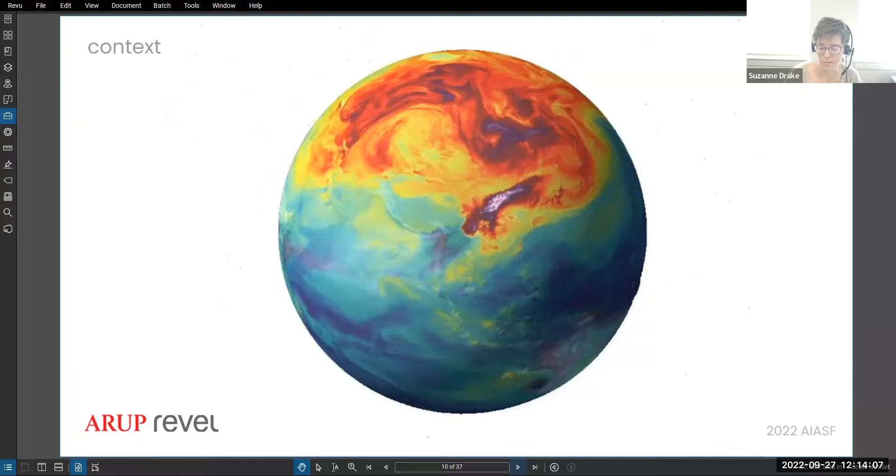And we certainly know now, better than ever, about supply chains being truly global. So we're here to talk about some of the things we can do differently right now. You're here because you already know in your heart that business as usual can't go on, and you're here because you've already lifted your head from the sand. And for that, I thank you very much. We will move on to our learning objectives. I'm just going to breeze over some of this and hand it over to Frances, because we need to jump right into the carbon basics and make sure everybody's up to speed.

Thank you. Thank you, Suzanne.

I love when you give that personal testimony, and it just reminds us of why we even care about this, and how you came to thinking about carbon and the impacts of design. So really the whole point of what we want to bring to you today is to equip you with some resources, and present it in a way that's a little more approachable. There's still a lot of information here, but we want to present different entry points and see what is most compelling to you, and just start anywhere you feel drawn to, and it'll lead you on a path in the same way it has for both Suzanne and I.

Carbon basics. We're going to use some terminology, just getting everyone up to speed on it, on the same page.

So embodied carbon is really another term for greenhouse gas emissions that are particular to the making of materials, and delivery, and the whole life cycle of materials, excluding the operational carbon part, especially the operational carbon of operating our buildings. Global warming potential is the more scientific term, and it's a very specific measurement. That's what you'll find in documentation, but colloquially we refer to that as embodied carbon.

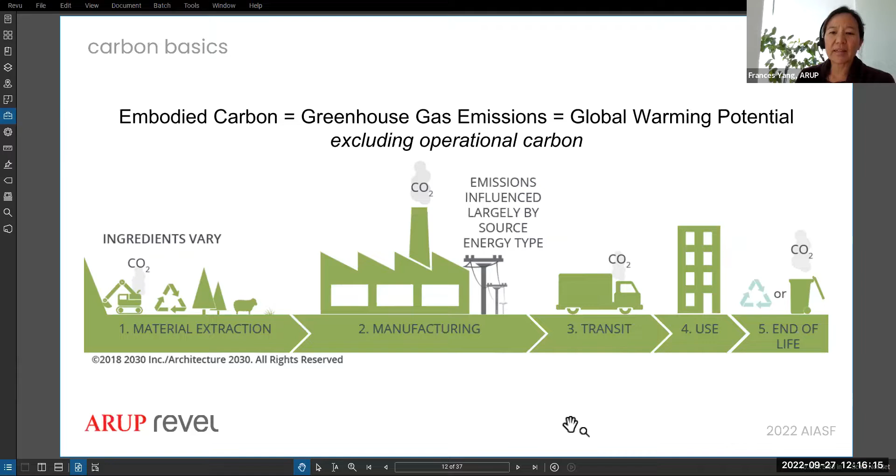So why does this matter? I think a lot of you have seen this pie chart that buildings, both when you combine operational and embodied, it's a huge piece of this pie, and one we have influence over.

Also thinking about where we need to get to, I think it's all kind of agreed now. There's a lot of consensus globally to get to zero by 2050.

This is a somewhat older chart that Architecture 2030 published a while ago. But what I really appreciated about this chart is the idea that a total amount of carbon emissions is what we need to limit. So while we say get to zero by 2050, it matters enormously how we get there. If it was just a straight line, that'd actually be too much emissions, and we would go over the tipping point.

They've actually changed the chart now so that it's even more aggressive, and we have goals to get to zero by 2040. You can visit their site for the updated one, but I just appreciated that how we get there matters, and the more we can accelerate quickly sooner, the more effective we can be in turning the tide on this.

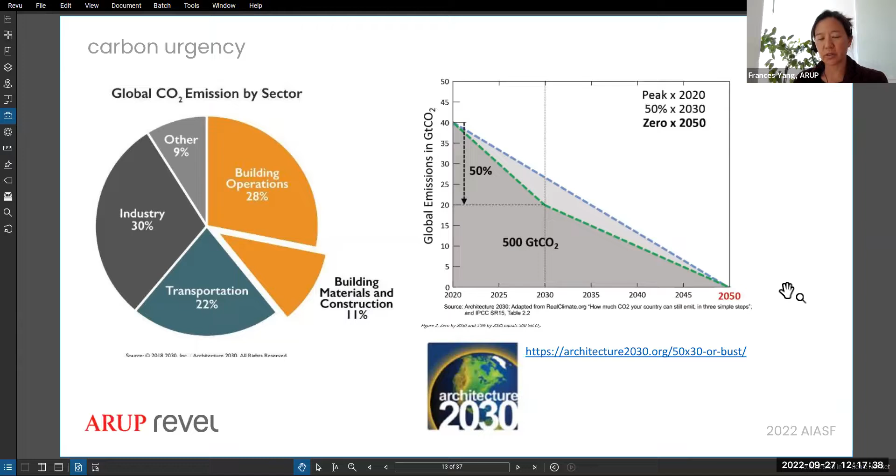So of course this is all with that in mind. Another thing working against us is how quickly we're building. Another statistic that Architecture 2030 has put out: by 2060 we will basically double the entire world building stock. That's just kind of mind-boggling.

And then if we think about, not necessarily how long, a lot of total carbon studies look at both operational and embodied historically, and in the past people felt, oh well, the embodied is small compared to the operational over the whole life of a building. But now, waking up and realizing we only have till 2050, most of that, it's only like the next 30 years, not the whole life of our new building stock.

And when you look at that shorter time frame and think about our new buildings, and even the ones that are meeting the goals, both AIA and Architecture 2030 goals of reaching net zero operational, 50%, almost half, is coming from the materials, because those are there on day one already. So that was a really unique way to start to look at the significance of embodied carbon. Again, thanks to Architecture 2030.

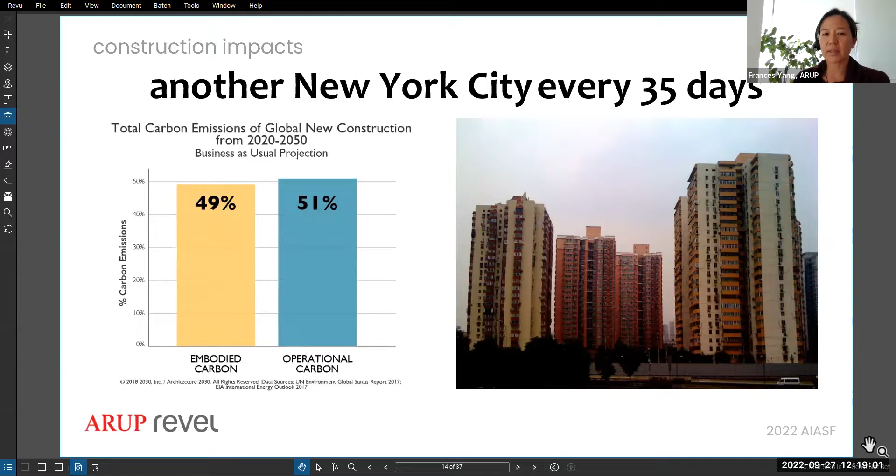Really just emphasizing the storyline coming out of the carbon research, in terms of operations versus embodied carbon. For the longest time as an interior designer, all I was hearing about was the embodied carbon of the core and shell, and how it was so massive, but I didn't see where interiors fit into that. These more recent studies pick up that obvious piece of the renovation portion of our industry that closes the gap to say, yeah, everybody has to focus on this. Nobody gets a pass anymore. So we're all in it.

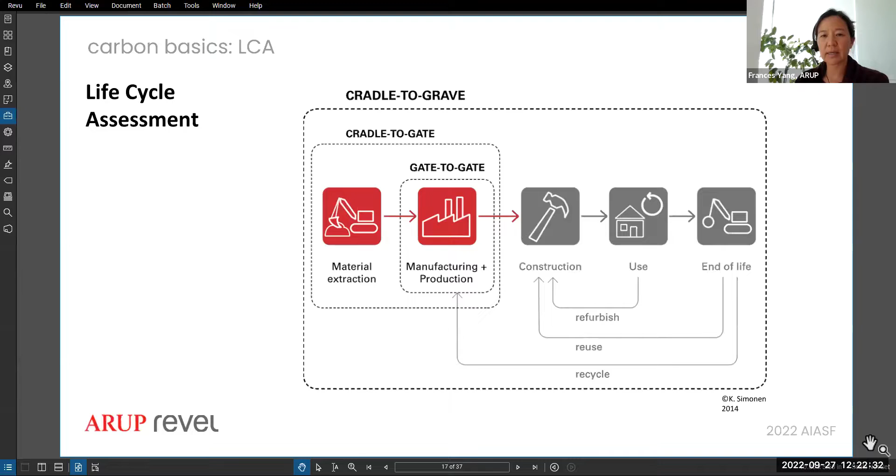Another diagram to try to make sense of a lot of terminology that's out there. So we think of a single product - we're going to dive into looking at some EPDs soon, and want to show what that derives from. So you have that coming from that accounting method we call life cycle assessment, and that actually produces the report. And the report of results is the EPD, the environmental product declaration.

But it has to follow some standards. There are ISO standards, and it has to follow what's called product category rules, which follow another ISO standard. So there's this standardized process involved to get to the EPD, and that's to make it so EPDs could be more comparable. It's not perfect yet, but that's the direction and the reason why we have all these standards that govern EPDs.

Now, how that fits in with doing a whole building life cycle assessment, which you might have also heard about - you can see how doing the LCA is like the heavy lift, it's the expensive part. And that information feeds into some of these tools or studies that people do to capture the whole building and the environmental impacts of a whole building. That whole building LCA also follows certain standards and will lead to a whole building LCA report.

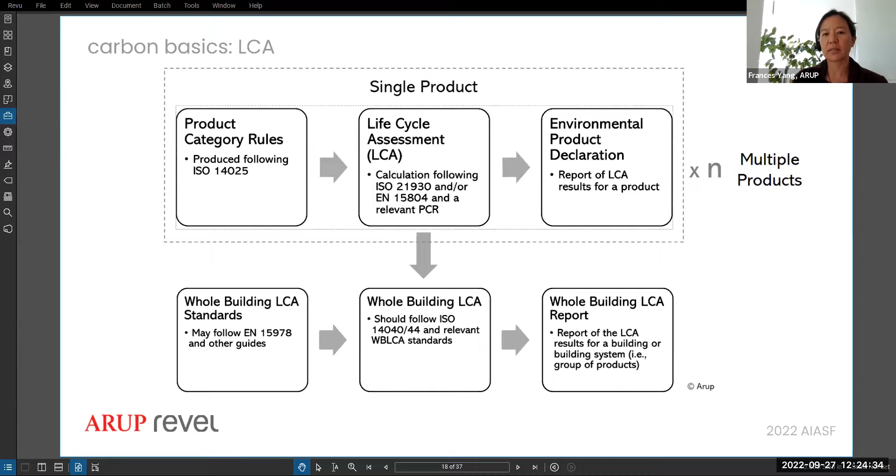Usually, quite often now, there are tools customized for buildings to help us get to those results without having to be a complete LCA expert. So hopefully that helps differentiate when we look at single products versus a whole building. Speaking of the tools, these would be the kinds of tools, especially for whole buildings - a really popular one called Tally that works off of Revit models. And there's also this database called Quartz, which is more where you could download an Excel file.

Quartz is, I should put a caveat, no longer supported. It was this great project funded by Google, but there's a bit of movement away from that and into other tools, because it was also trying to provide health information, and there are other outlets for that now.

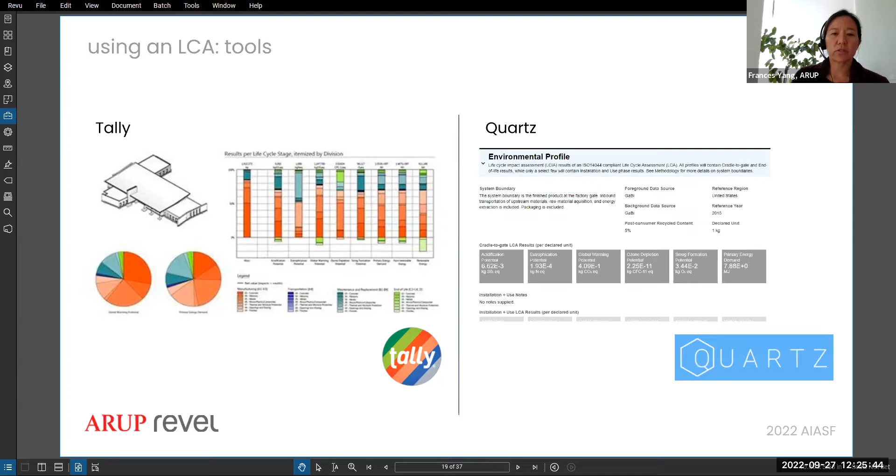Then there's Tally, and other similar tools like Tally, but Tally is the one that can actually work within a Revit environment, which we think is a big plus. There's also ones you might have heard of, like One Click LCA, Athena—particularly for Canadian data—and it gets more specific geographically. So there are quite a few whole building tools at one's disposal.

I wanted to give an example of use of Quartz in particular, because it felt like this was one result from a project recently that was very telling of the importance of interiors. This is where Quartz—it's generic information, so is the data in Tally—and the usefulness we found was to identify the hotspots and see what it is we should tackle.

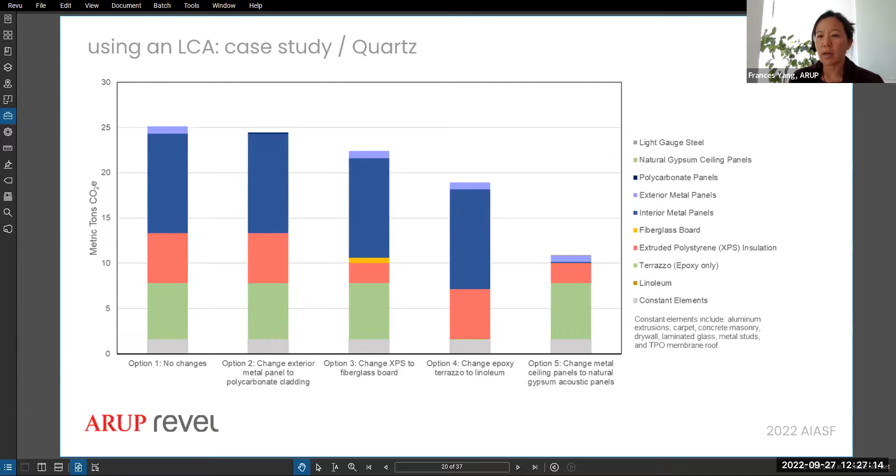Tally is dependent on a Revit model, and realizing that a lot of interior designers don't necessarily get to be at the Revit model, especially not till later in design, we used Quartz with Rhino, just based on surface areas, to get a sense of approximately how much would be wallboard versus panels—what kind of ceiling panels, what kinds of flooring. So we assigned what we knew were the predominant materials, and it really struck us that the most opportunity was in some of these interior items, like the flooring and the metal ceiling panels.

Similarly, for commercial interiors, we were commissioned a study by the Carbon Leadership Forum, and just before this, the Carbon Leadership Forum did a study—the link I put in the chat—that focused again on interiors items. This graph was really helpful to again look at where the hotspots are, where the systems are that we should really put our attention to.

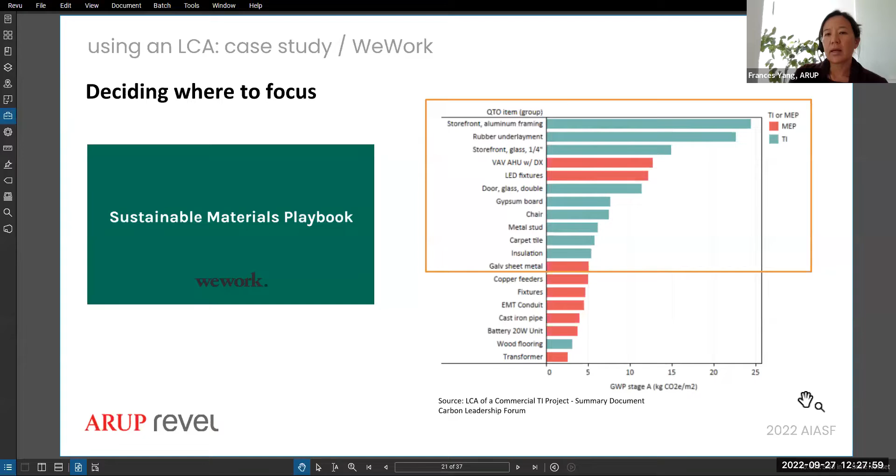From this, when we were working with WeWork, we turned this into something useful either for a client that has a lot of really similar fit-outs, brands and styles, or for your own firm—if there's a palette you turn to repeatedly, something like this could be developed where there's guidance for each of those, so you pick out the top tier of those high-impact systems.

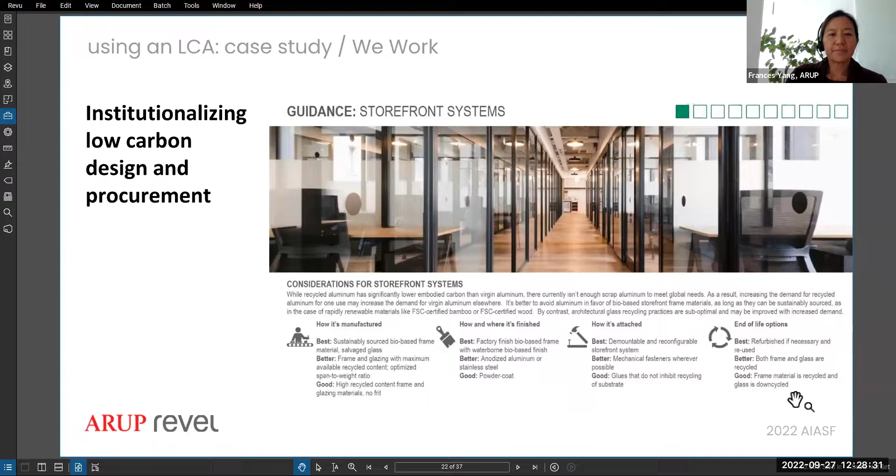So we have EPDs—what are they? They are the life cycle analysis, basically a report. There's no standardization about the look of the report; the data can be sprinkled throughout, but they do all have to report on the same types of things. So when we jump into the EPDs and look at them more closely, that's what we're going to focus on—sorting through them. It can be very daunting; some of these documents are 10, 20, 30 pages long, and so dense with information. But I wanted to spend a little time highlighting the specific things that are most useful off the top.

What I want to highlight here is what is not in an EPD—we don't have health impacts. That's covered under the Health Product Declaration, the HPD, which is meant to be like a companion document. Ideally every product would have both of these reports. That's not where we are right now, but from my own use of HPDs and EPDs, generally speaking, lower toxic products also have lower carbon impacts—that's a nice synergy to see. We're going to spend just a couple more minutes on how you can use these documents to account for carbon on your projects.

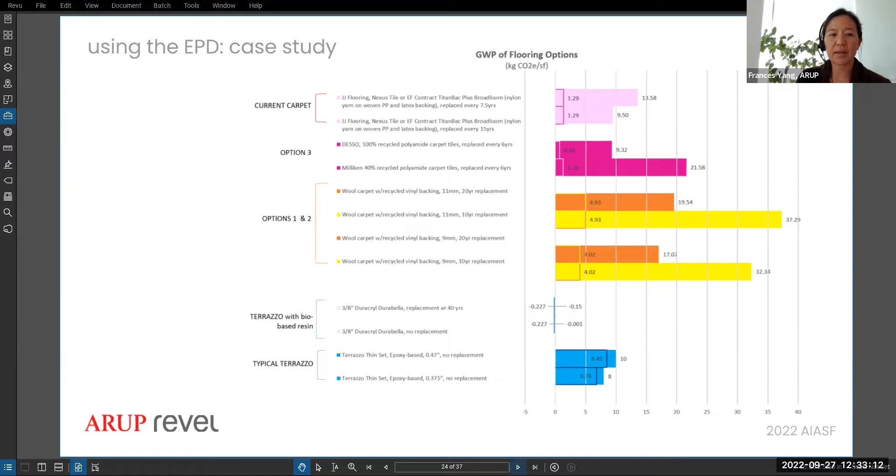And the bio-based material was enormously better than the fossil fuel based materials. So those are some of the takeaways, and then we'll show next where to find some of these EPDs.

Mindful Materials is more of a general database. All the products in Mindful Materials have some form of transparency documentation. They may not specifically have an EPD, but there are other materials there. And if you're a Material Bank user, you can sort through via Mindful Materials as well—there's a nice connection there.

EC3—Frances, maybe you can chat on that one. I don't use that one too often. EC3 is solely focused on EPDs, and it was originally designed for contractors, but it's become really handy even for design teams. You get to see the range of GWP, the embodied carbon number for a whole variety of products, and they have charts that help synthesize the data because they've digitized the information in the EPD.

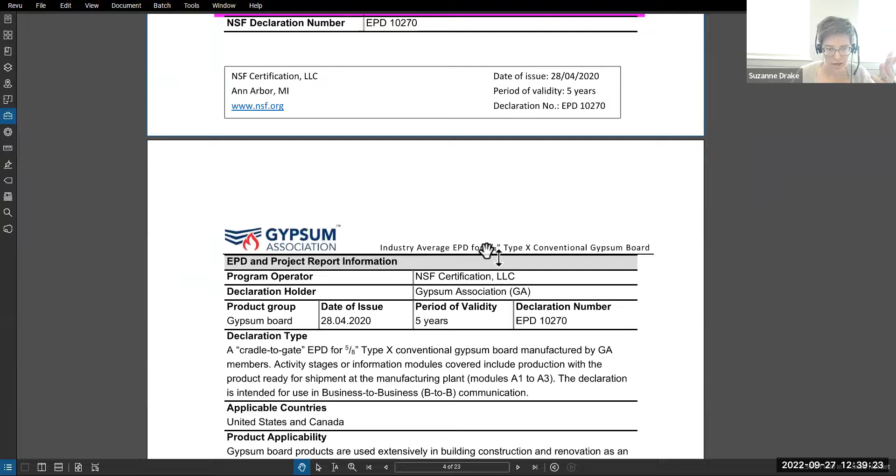So the 5 categories I'm looking for: product name and type, scope, functional unit, validity we just talked about, and then hopefully somewhere in here you're going to see the actual global warming potential, and that's the number that the whole document is wrapping up to.

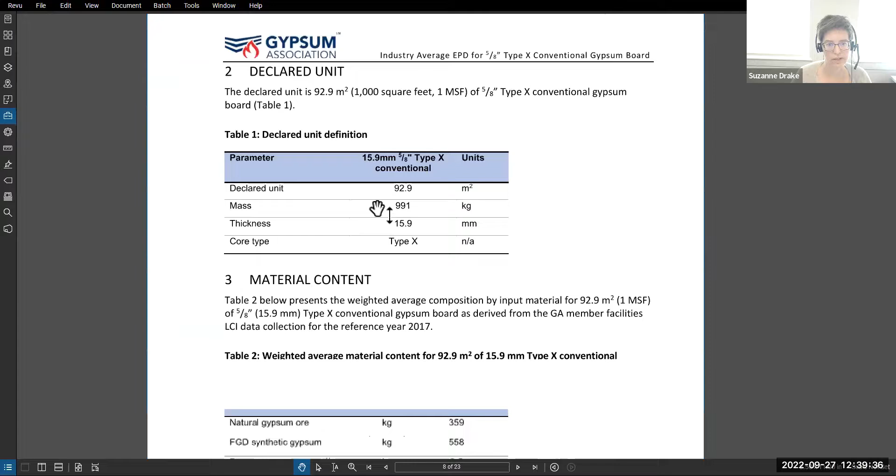So there's lots of background data, more information about the things we've already covered, the declared unit, all the details behind it. If I'm not familiar with the product type, this is actually fairly useful just to see what all is typically in it. This is by no means as thorough as an HPD would be on ingredients, but it gives you an idea.

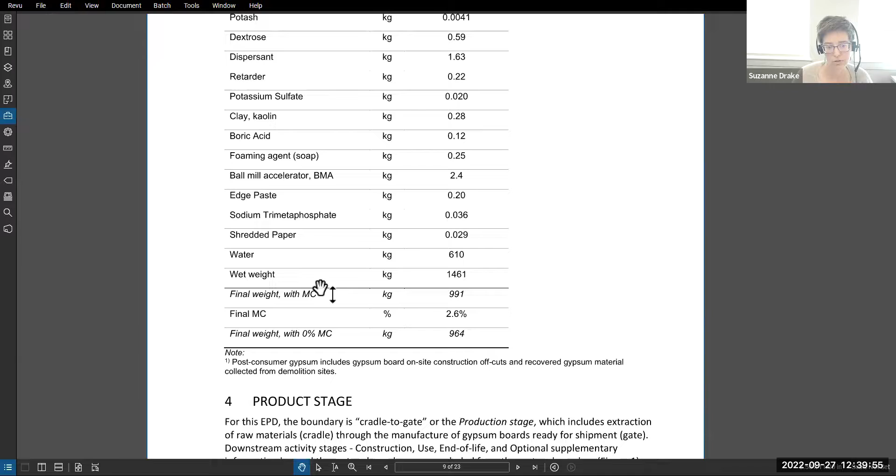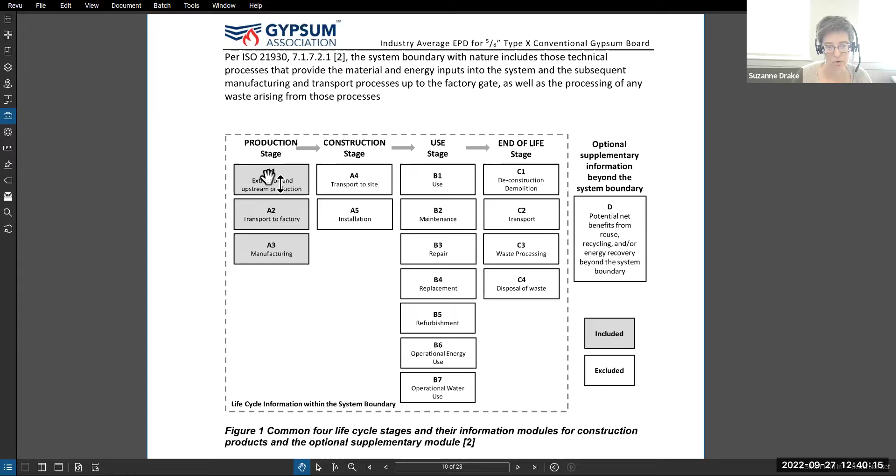They talk about their cradle to gate, the scope, and usually include a diagram. This is the entire scope that could potentially be included, but as you can read in the diagram, they've only included cradle to gate. So it's from the ground to leaving the factory, leaving out a lot of stuff in this particular example.

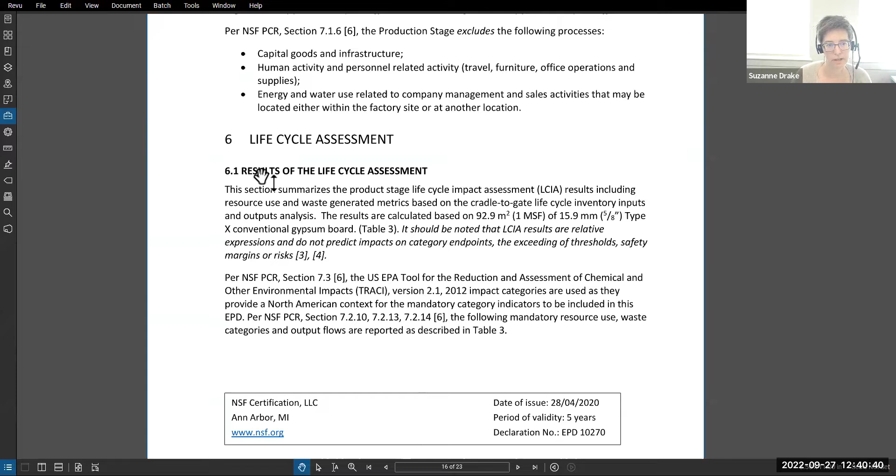But we can still scroll through. This is all the backup data, more information about the rules, how they actually did their calculations. Usually there's a section called results or impacts, life cycle. When you see those words together, you're getting close to the summary.

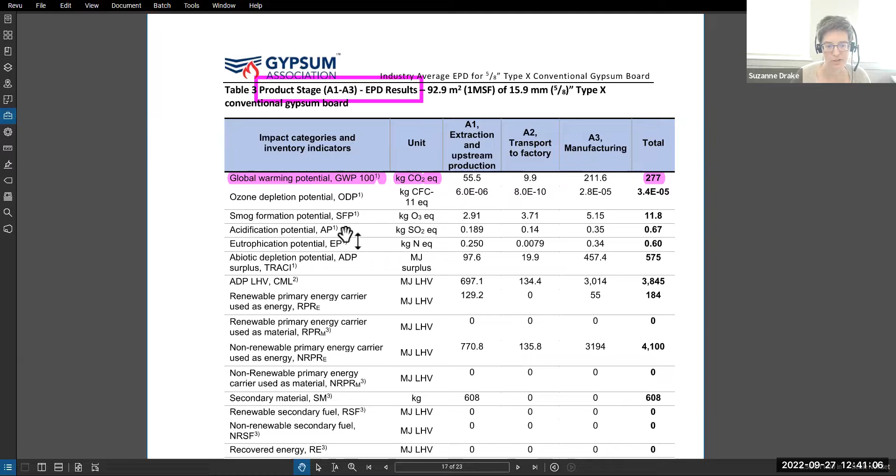And this is where we want to get that top number: global warming potential in kilograms of carbon dioxide equivalent, and it gives you a number. That's the sum total of what we've been looking for. EPDs, besides the global warming potential, do include information on a lot of other aspects of environmental impacts, which can also be very interesting and informative.

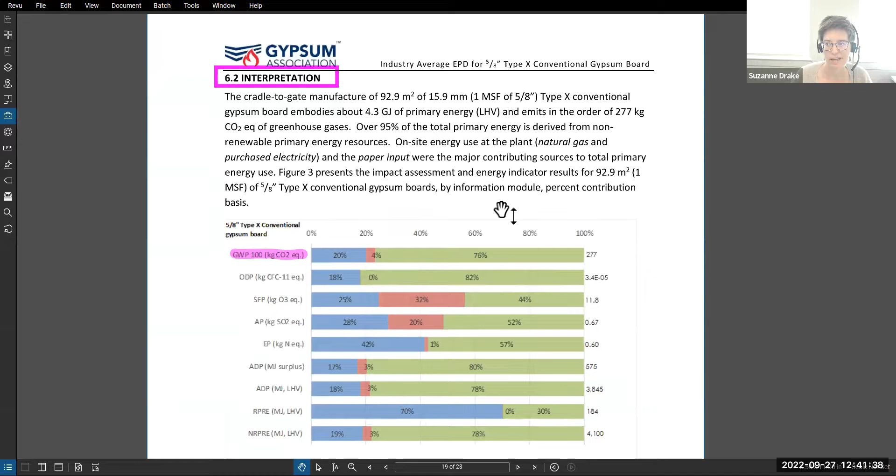But as we were just talking about embodied carbon, that's the number we're looking for. Continuing to scroll through, you see lots more data. There's usually a section on interpretation that gives a little more breakdown, and Frances has some good points to make about this, so I'll let her talk in a second. Then we get more into the definitions, and then references, and that is the end.

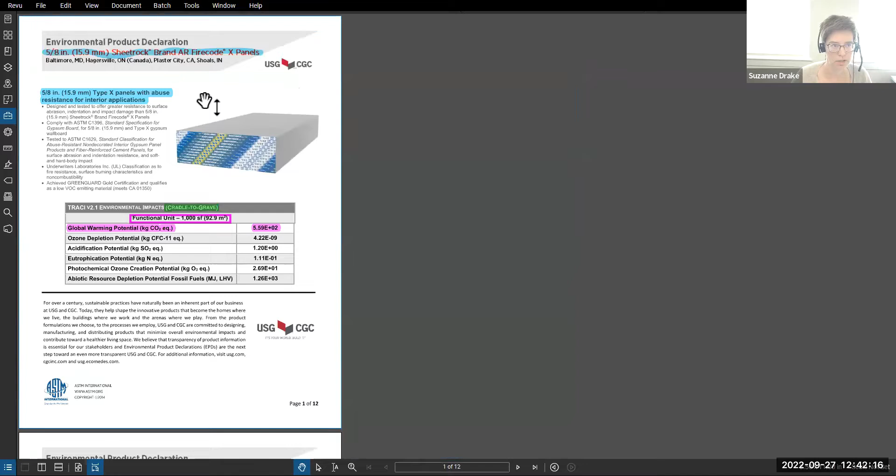So this one was 23 pages, and it was an industry average. I want to now just grab... let's get our specific one. I have 2 product specific drywall EPDs, and these are a little bit shorter, 12 pages from USG. They did the 5/8 inch sheetrock.

You can kind of see they've organized this a little bit differently. Got your product information right at the top. There's the scope, there's that functional unit, and there's that magic number that we're looking for.

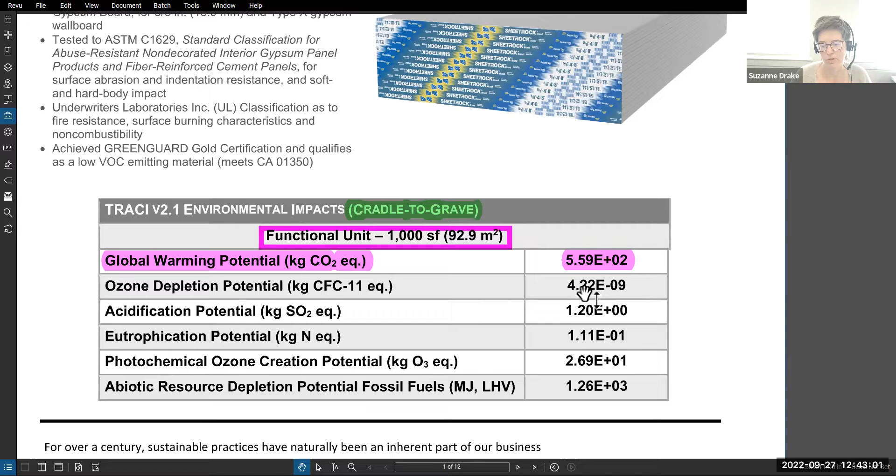Just a quick note, if you can remember back to high school science and math class, scientific notation - when you get lots of zeros, sometimes they go to scientific notation just so the number fits in the table. Positive numbers are more zeros, and negative numbers are the zeros behind the decimal point. So just keeping that in mind.

But all that same data is in here. Here's that PCR, the validity dates, the product. I'm just giving you that visual.

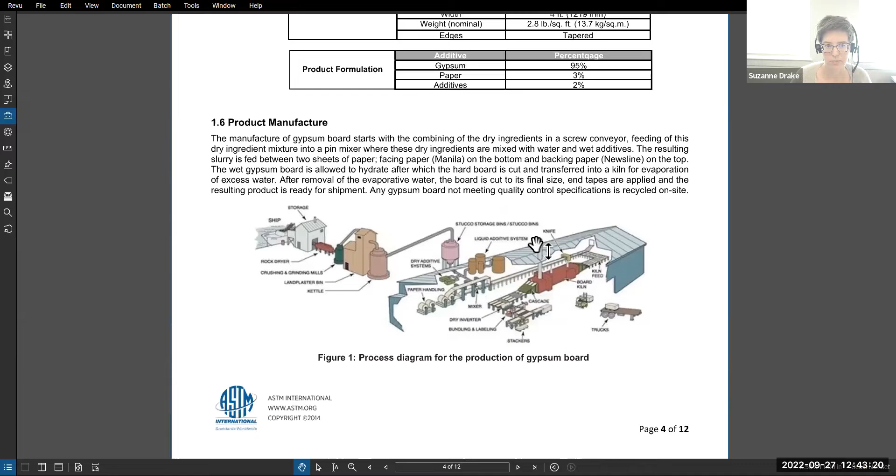Here's a different kind of diagram, but they're still telling you about how it's made. They are giving you all sorts of information, end of life, what to do with it. Usually all of this information is in most of the different EPDs, just maybe with slightly different titles and whatnot. So again, very useful

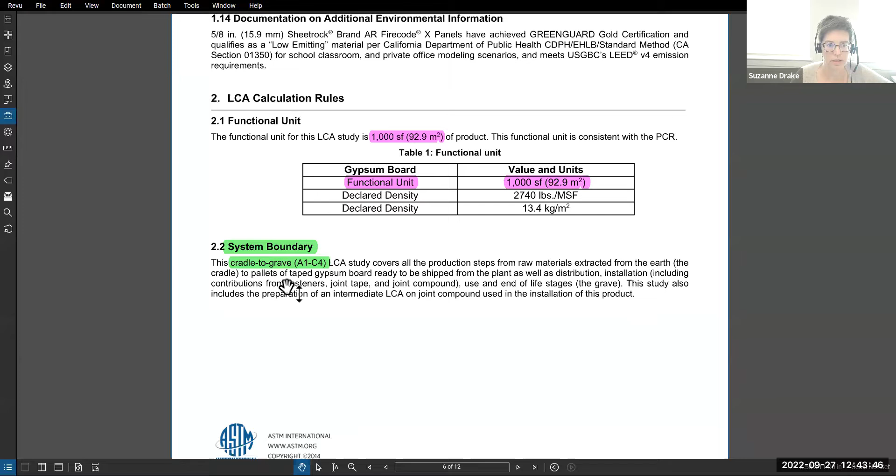in terms of understanding a product. This particular EPD is cradle to grave, which is a larger scope than the previous EPD that we looked at. It actually covers everything from coming out of the ground all the way to the end of life of the product. So it's a more comprehensive, I guess I'd say, EPD.

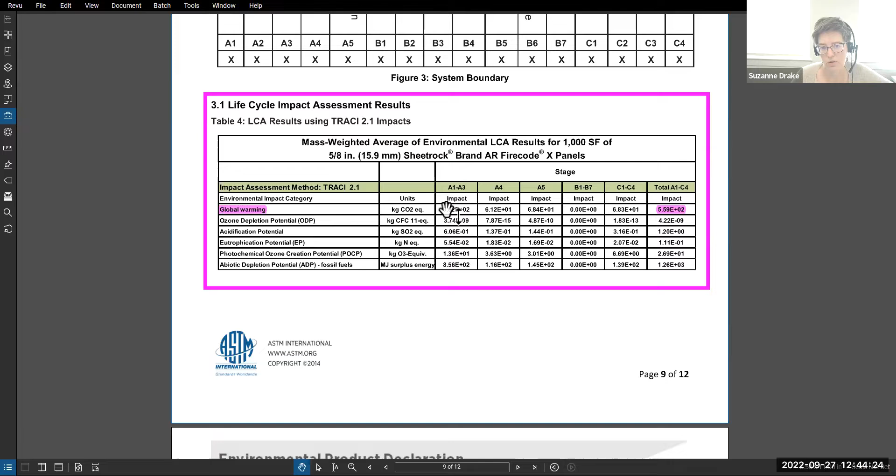I think that was about it on this one, again with the interpretation section. And I'm just going to pull up onto the screen the last one. And then, Francis, I will let you highlight anything you want to look at. And we'll also, you guys, if you have any questions, now would be the time to get them into the chat.

So here is the EcoSmart product, same size, same manufacturer, same scope, same declared unit. Here's that summary of the global warming potential.

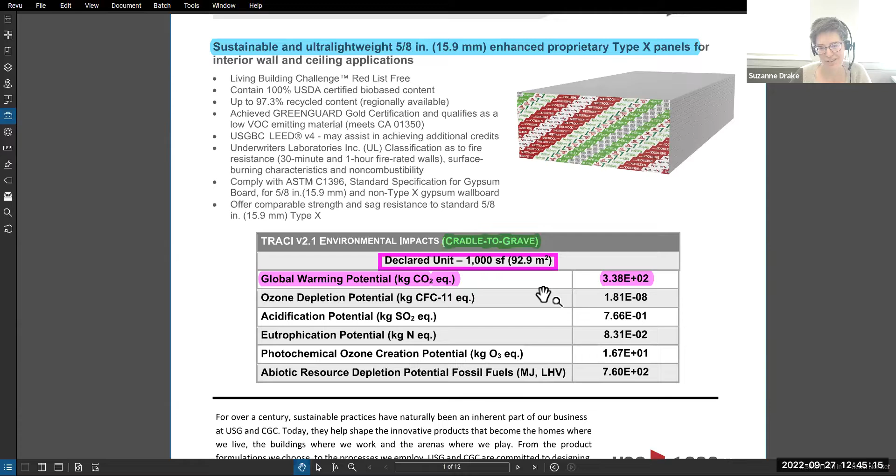And it's, if you didn't remember from all those numbers flying by on your screen, this is a lower number than their standard product. So this is really the ideal way to use it in terms of comparing two different products, that they're very specifically

lining up against all those data points that we've been talking about. The declared product, the reference PCR is the same, even the date of issue and the period of validity is the same. And that's important because we know that the data is coming from around the same time, so there's probably not any differences in manufacturing changes or anything like that.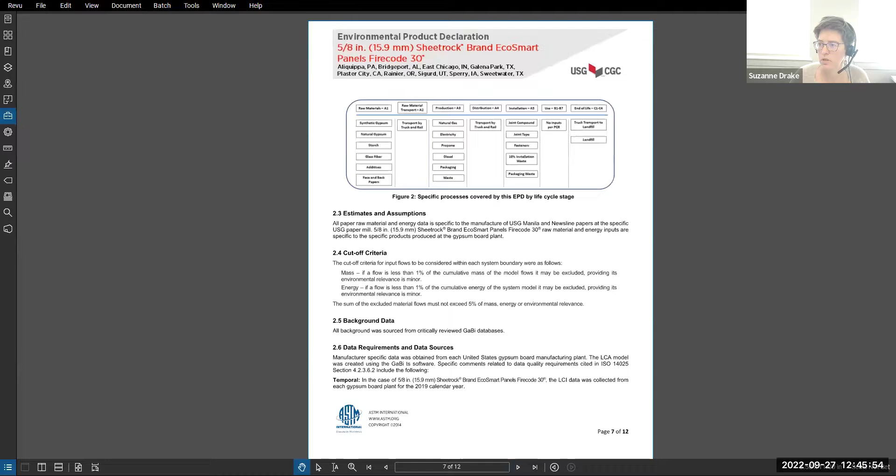Charlie's reminding me that we have about 15 minutes left, so I'm going to just leave it at that. And Francis, why don't you jump in? And anybody who has any questions about this, let us know.

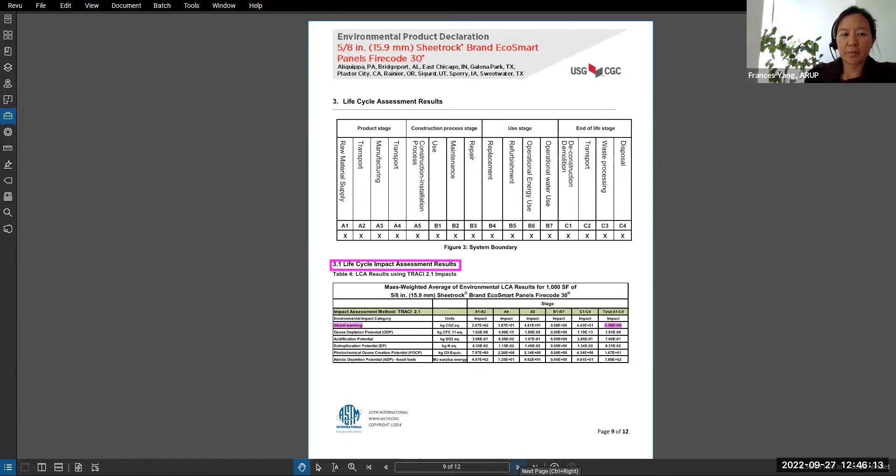Yeah, thanks, Suzanne. I realize that there's a lot there. I think that one of the biggest things that we can do is just to ask for these.

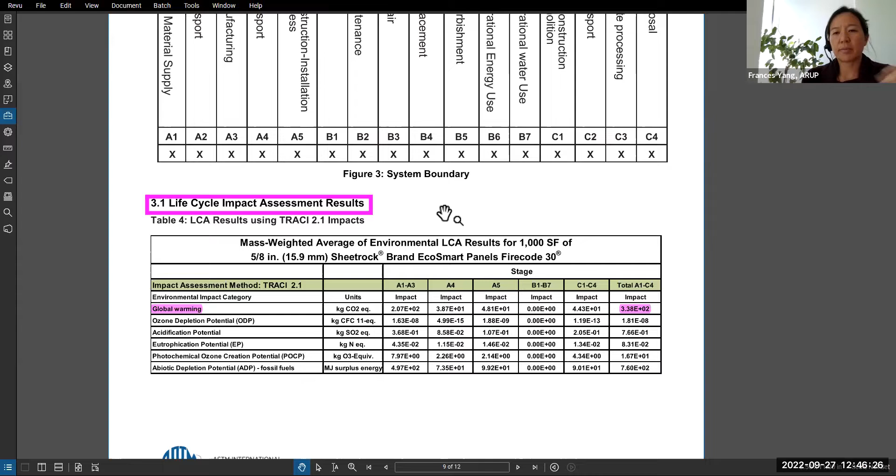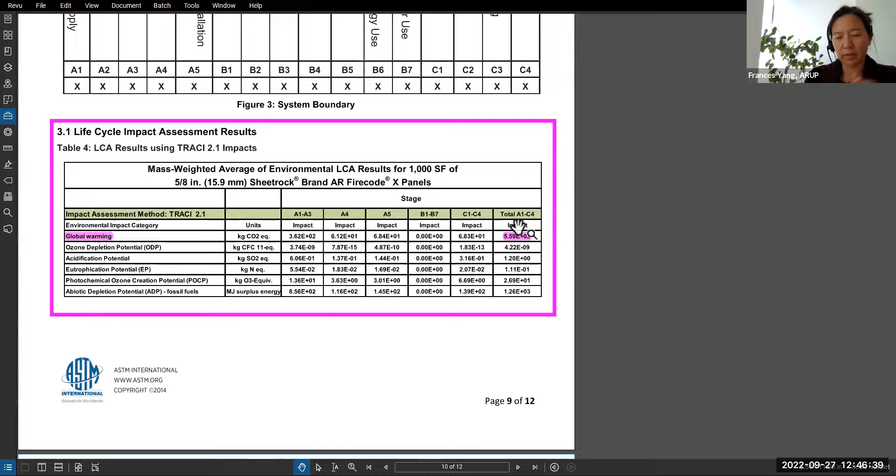Being able to compare product to product - if it's the same brand, like the two that Suzanne was showing, the same brand with two different product lines, that's probably - though you double check - most likely going to be using the same PCR, check that the dates are quite near each other. That's probably the safest comparison to do between EPDs.

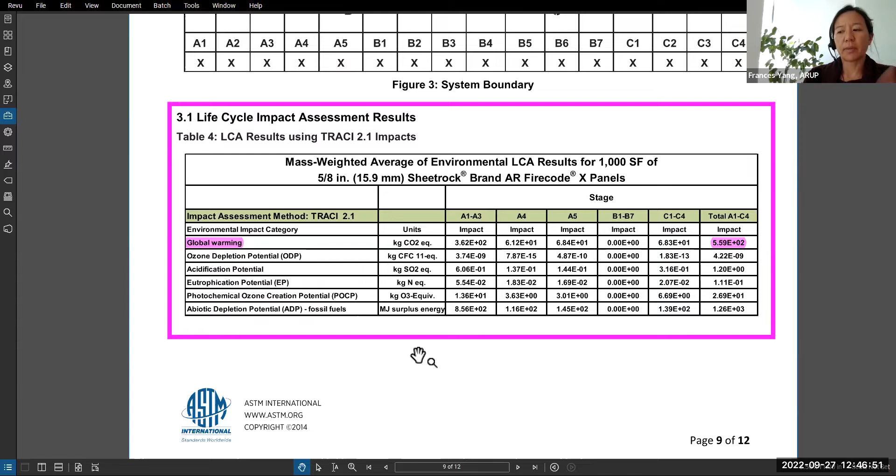Once you get into different manufacturers, definitely if you get into different PCRs or dates that are really far apart, then that's where it starts to be much less comparable.

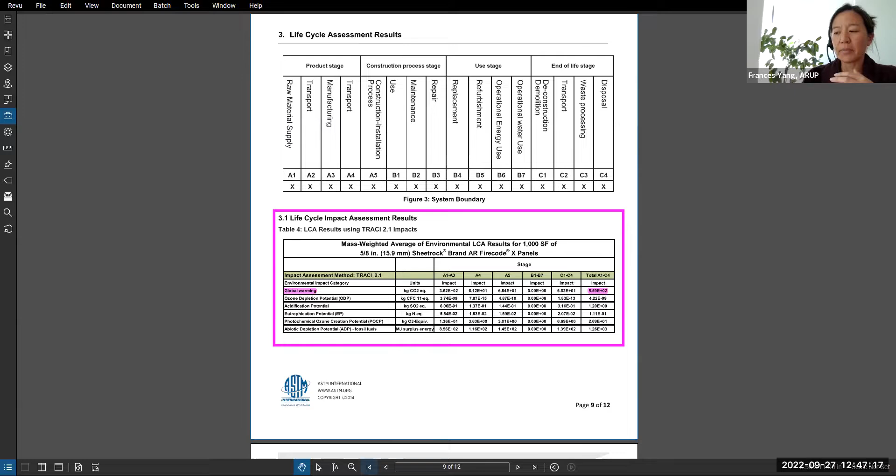And you're maybe just looking for order of magnitude, or even just things about, especially in the interpretation - if one manufacturer is saying that their product is doing things that make it so much better than their competitors, then it's like, show me the EPD. Is it an order of magnitude better, is it significantly better, or is it just minutely better?

And then it really just becomes the seeds for a conversation with manufacturers, because EPDs are useful - they're saying, okay, well, we want transparency, show me the EPD. And that's where it's really not necessarily just that final number and what percentage difference it is compared to either the industry average or a competitor's product.

It's more like, tell me about how you made it and what it is you're doing - at least improving upon yourself from each issuance, because these expire, and it's the 3 to 5 years when we would hope manufacturers would make improvements in the way they make their products.

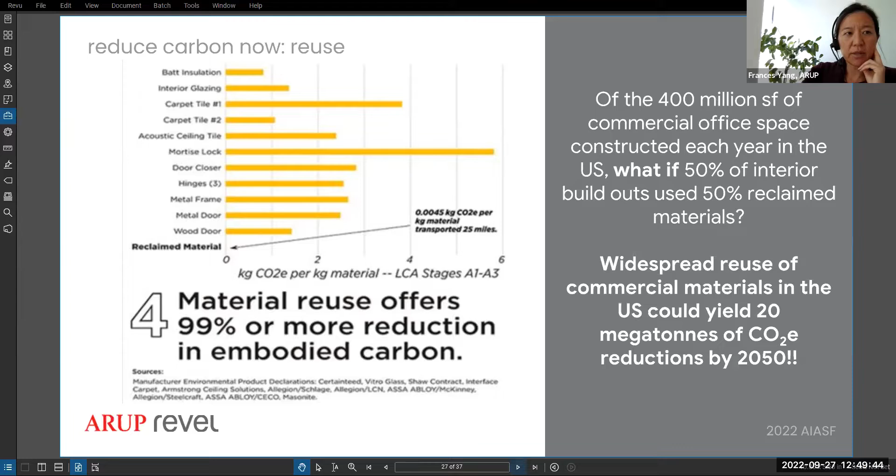Then I think the last concept we wanted to share related to reducing embodied carbon in interiors is the notion that building materials and buildings don't necessarily need to be a source of carbon emissions. Because there are building materials that, in the growing or through other technologies, sequester carbon, that absorb carbon or CO2 in making the material, building materials are uniquely positioned within the entire building life cycle to be a carbon sink. So we could actually be drawing down carbon through the choices of what we put in our buildings.

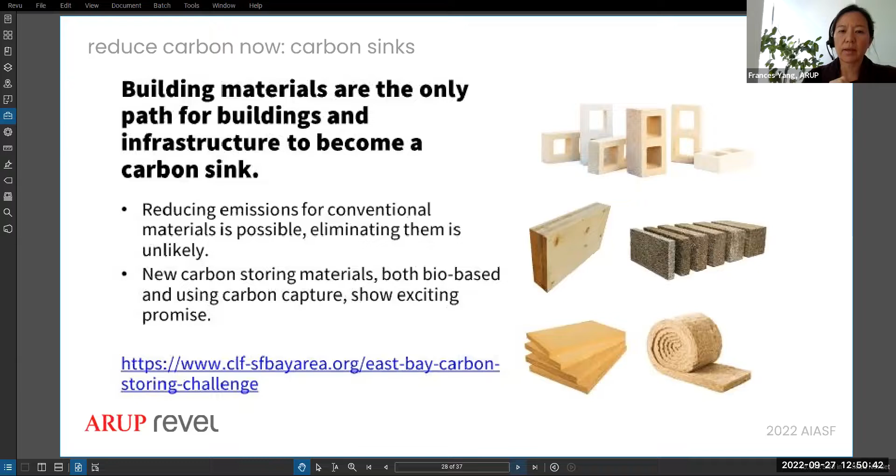So this was really to remind us that while there's a lot of information here, putting it into practice really starts with the ask. So asking for transparency, this goes hand in hand with health and other things we want to know about building products. In the same way that we've been asking more for material health information, we want to ask more about products, where they come from, and how they're made, to understand their impact on carbon as well as on the climate.

Along the lines of putting this into practice, as designer specifiers, as a community, while we're pushing through that ask, there is a pull happening too through policy. In California in particular, there's quite a lot - I had to only take a snippet here, I'd encourage you to visit the Carbon Leadership Forum website, and I can put the more direct link later. We have the Buy Clean California Act, which covers some of the major core and shell materials. But there was a huge effort just last year to introduce parallel acts to address finished materials and ask for product-specific EPDs. Unfortunately, it did not pass. That's where groups like AIA California and Summit, trying to act more at that statewide level, could use more support from designers, architects, and interior designers to gain momentum and actually get some of this through.

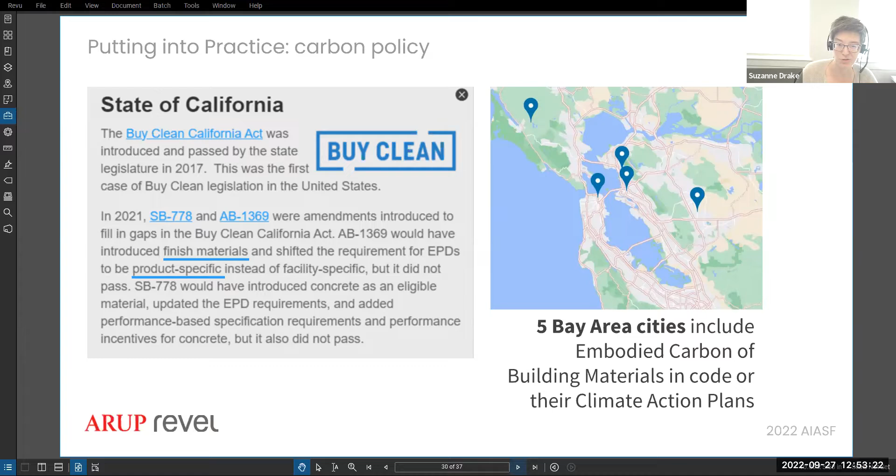It's kind of an interesting process, but carrying on. Definitely outside of what you'd consider the normal scope of a designer, but to get to where we need to be, it's quite daunting sometimes to think about how we get to zero by 2050. It's going to take everyone, and the more policy gets design support and design gets policy support, the more it'll accelerate.

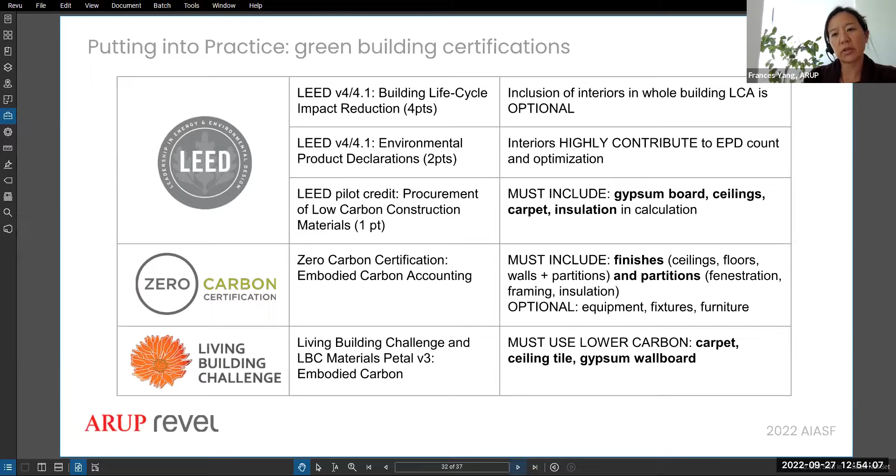This is a slide we're hoping will help summarize some of the green building certifications and where interiors fit in. Let's not dwell on this too long, you can have these slides later. What we really want to jump to is the pledge.

The question was asking if I have a tangible example of how we've used EPDs to make decisions on products for a project. I'm going to be very honest and say no, because the type of projects I'm typically involved with are more around tenant fit outs—the quick churn landlord projects, the smaller client tenants moving into buildings.